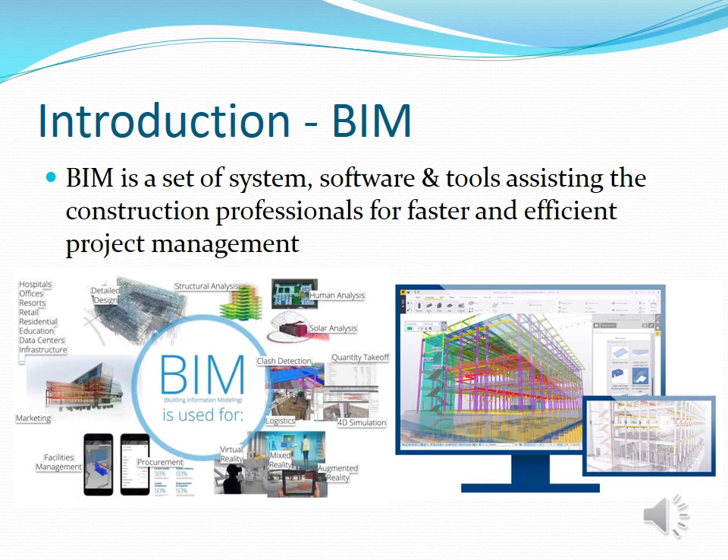Although it is a very good system, its use in Hong Kong is still very much limited. In recent years, Housing Authority requires construction projects to integrate with BIM, but only a few famous projects in the private sector could be selected within the Hong Kong territory. In this focus study, One Island East Commercial Centre is selected as our target building, and how it is integrated with BIM applications will be explained.

One Island East is a building located in the Eastern District, which is used as a Grade A commercial centre developed and owned by Swire Properties, built by Gammon Construction Limited. Unlike any other commercial and office buildings in the Eastern District, One Island East is a 70-story Grade A commercial building located at North Point. It was the first commercial building designed and constructed by BIM in Hong Kong.

This fascinating and advanced technology is a game changer to the construction industry, as it greatly cut the time, made it more efficient and faster to build. The coordination between builders' works and building service works was better as well.

The main reason for adopting BIM technology, according to Swire Properties, was the comprehensive 3D geometric coordination offered by BIM. Everyone in the industry knows that there are lots of parties taking part in a construction project. Building design, structural design, quantity and cost estimation, building service works, and defects rectification parties are no exception. However, the coordination between these parties is always troublesome. In the old days, no BIM could be used in buildings.

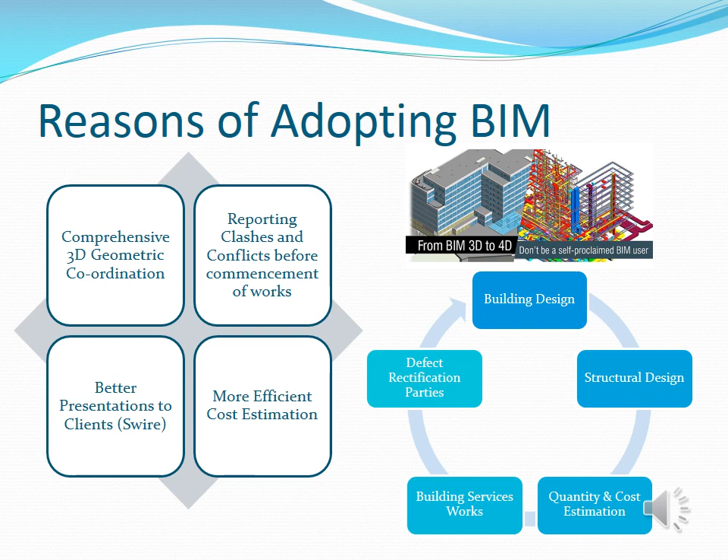Time is always the most important element of a construction project, and thanks to BIM, it saved much time in this project. This mighty 70-story building project just took 3 years to complete, which was a huge step up for the construction industry in Hong Kong.

The diagram on the screen shows the areas of BIM applications in One Island East. 3D means graphical design of the building, according to a handbook for construction planning and scheduling. The BIM for the One Island East project was generated by Gehry Technologies' Digital Project software, so a comprehensive model could be better delivered to Swire.

4D means construction sequencing and project simulation with the BIM model. During the tendering process, in selecting a main contractor responsible for all of the builders' works, all the contractors submitting their tenders were required to hand in a 3D BIM model with construction process simulation.

Over 2,000 clashes and conflicts were known before the commencement of works. And 5D refers to the cost estimating and electronic tendering. The BIM model integrates design with quantity respectively. The estimator could easily check how much material has to be used in that element. With that, the bill of quantity could be generated faster.

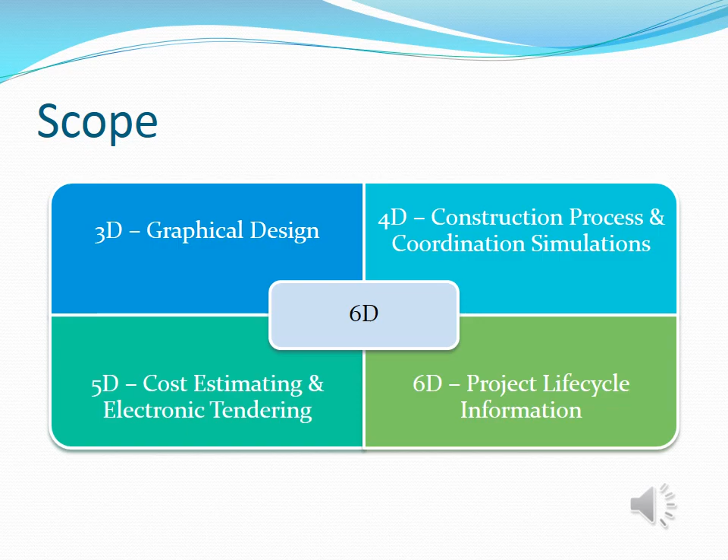In the next session, I would like to talk about the application of BIM in One Island East. In the 3D models, the client Swire Properties has adopted the Digital Project software from the BIM consultants. It comprises two functions, product modeling and process modeling. It also allows clash management, and it integrates the various CAD drawings, for example, MEP drawings and structural drawings.

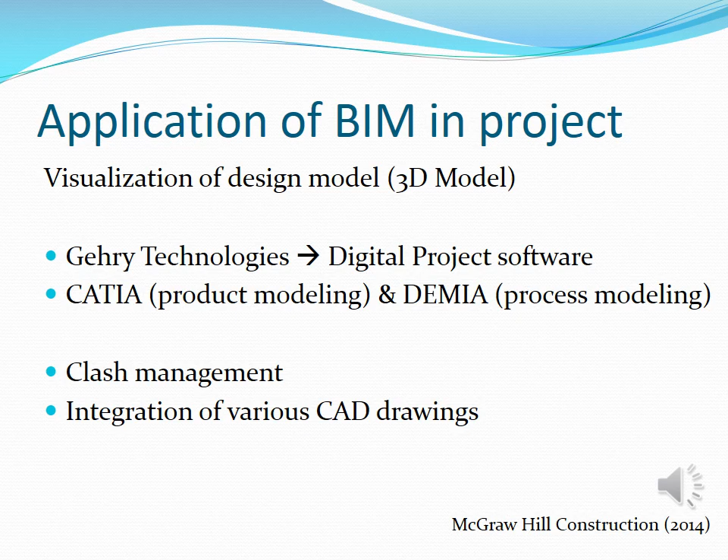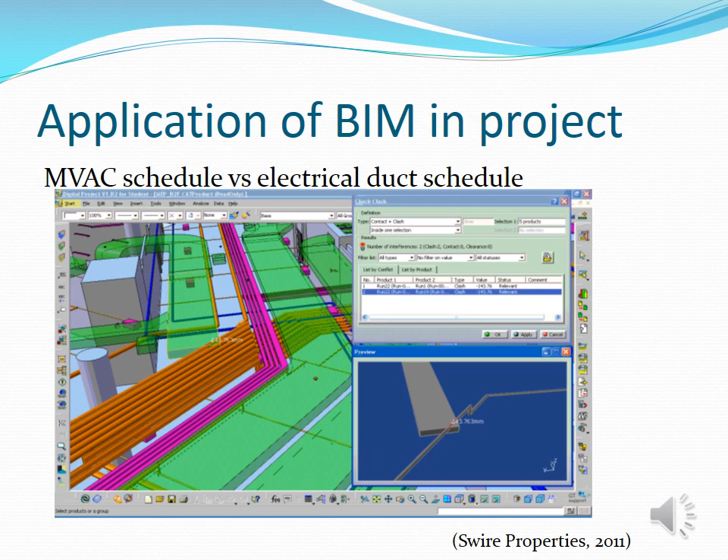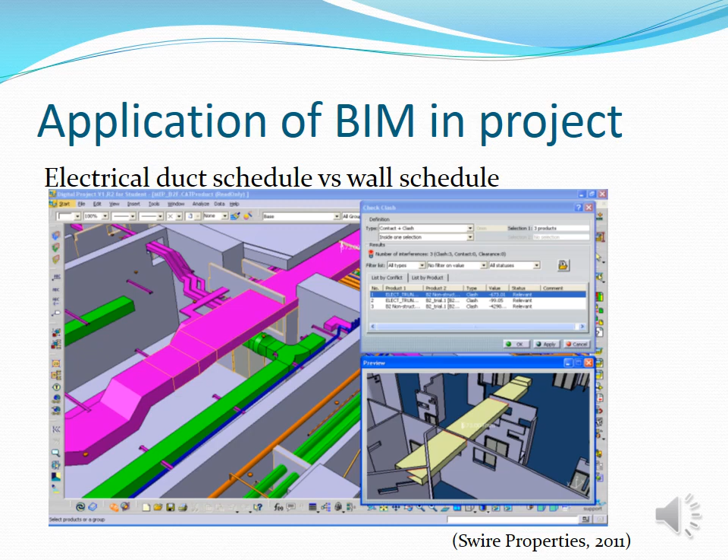Here we can see the clash was detected from the 3D models. And this is another example of clash management. In this case, Microsoft Project was used for project scheduling. The work breakdown structure was built in the 3D models, and the contractor can use the work breakdown structure to handle and update the BIM model data.

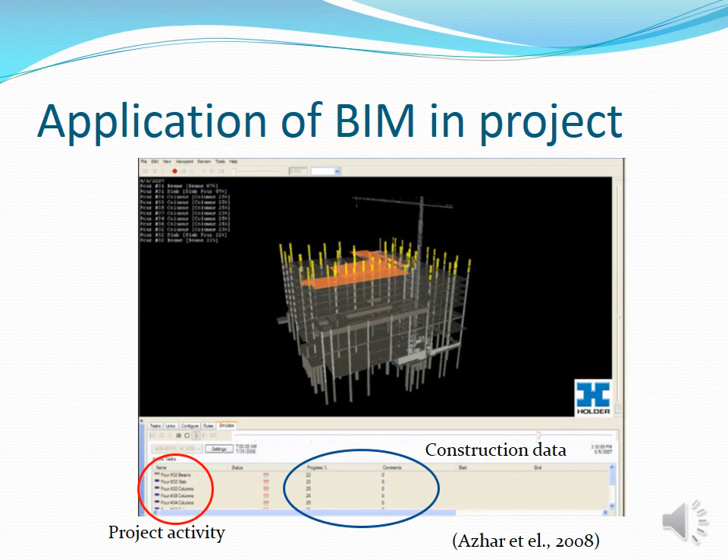By using BIM, the process of the project activity can easily be maintained by inputting the construction data into BIM models. Using BIM can schedule the construction sequence, and workflow clashes can be avoided. From the figure, we can see that the workflow was planned and scheduled, for example, from formwork to concreting.

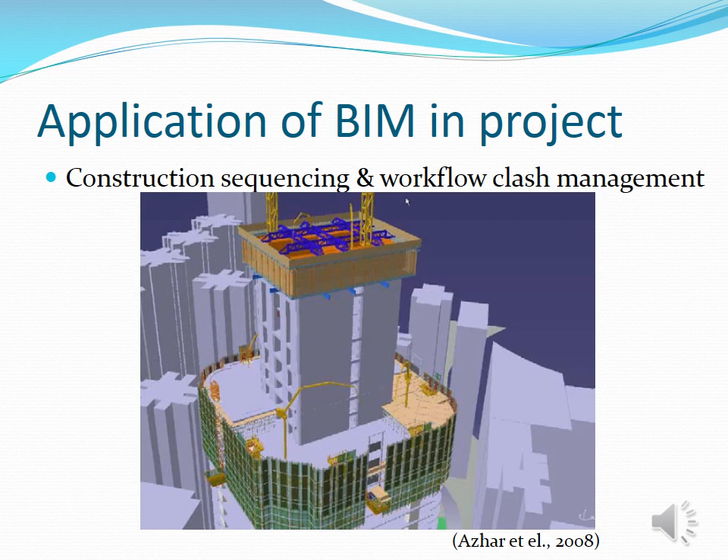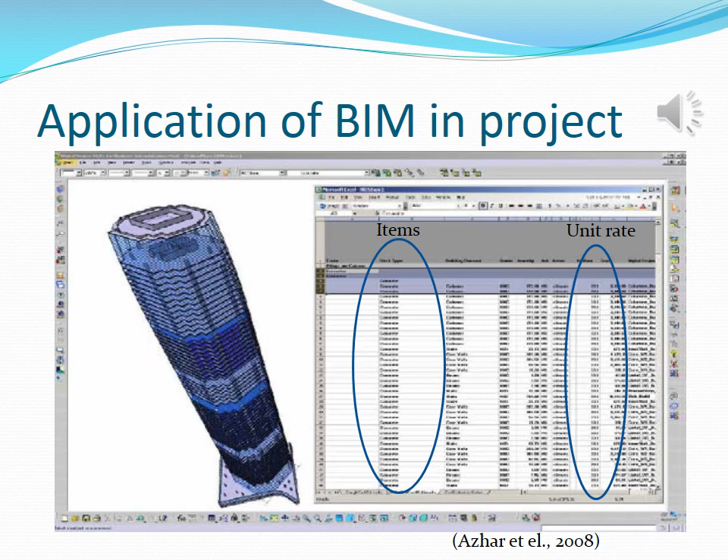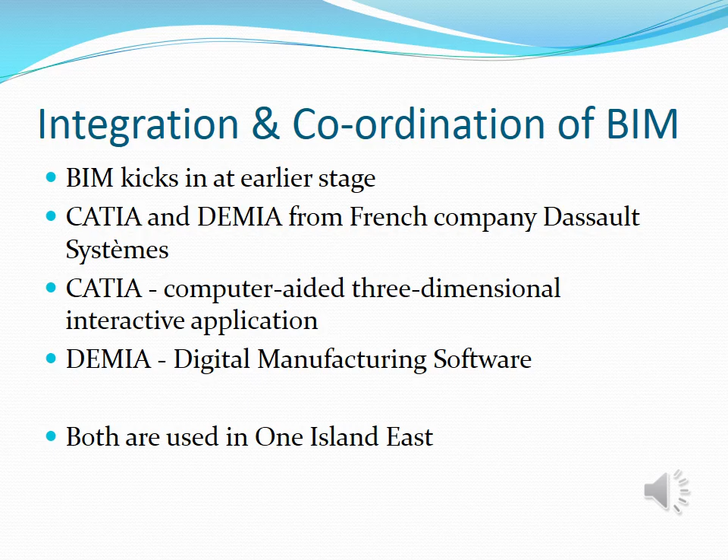After construction completion, the BIM model will be transferred to Swire again for facilities management. The BIM model will be used in operation and management and also RMAA works, for example, to schedule plant maintenance. For integration and coordination of BIM, BIM kicks in at an early stage, in which two programs from the same French company are used.

The decision of adopting BIM was made after reaching the schematic stage of design, and in this project, all elements, including the plumbing system and electrical system, are all used in BIM. Also, Microsoft Project and Primavera are both used in this project. The O chart of One Island East is a bit different from an ordinary project, in which the element of BIM is added into the O chart.

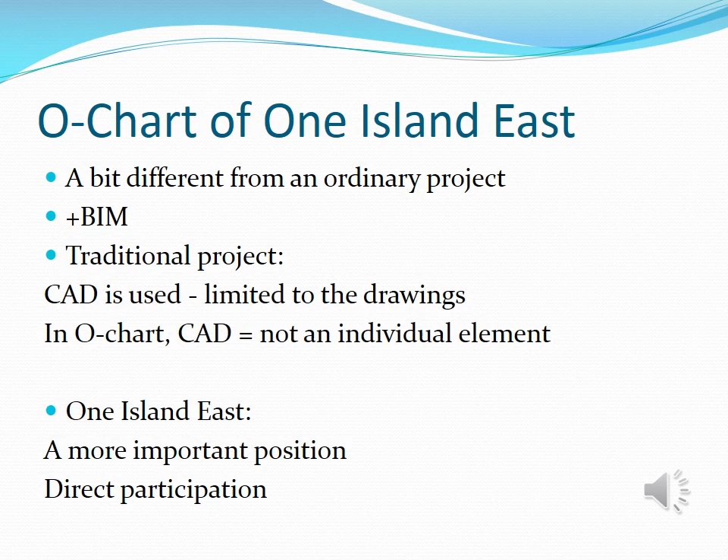For a traditional project, if CAD is used, CAD can only have a limited scope of work, so CAD cannot be added into the O chart. But for One Island East, there is a more important position for BIM, and direct participation is achieved. So the O chart will include this BIM element.

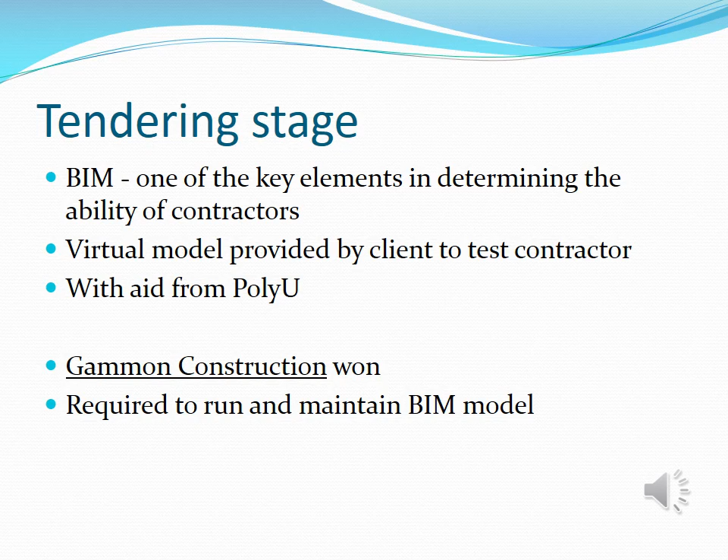In the tendering stage, BIM is regarded as one of the key elements in determining the ability of contractors, in which virtual models were provided by the client to test the ability of contractors with aid from PolyU. Finally, Gammon Construction won the tender, and Gammon was required to run and maintain the BIM model throughout the whole project.

In the construction stage, the use of BIM enables the project manager to coordinate the working sequence more effectively, for example, the arrangement of subcontractors. Also, BIM can foresee what should be done next. For example, the movement of construction materials or the movement of labor can all be visualized in BIM.

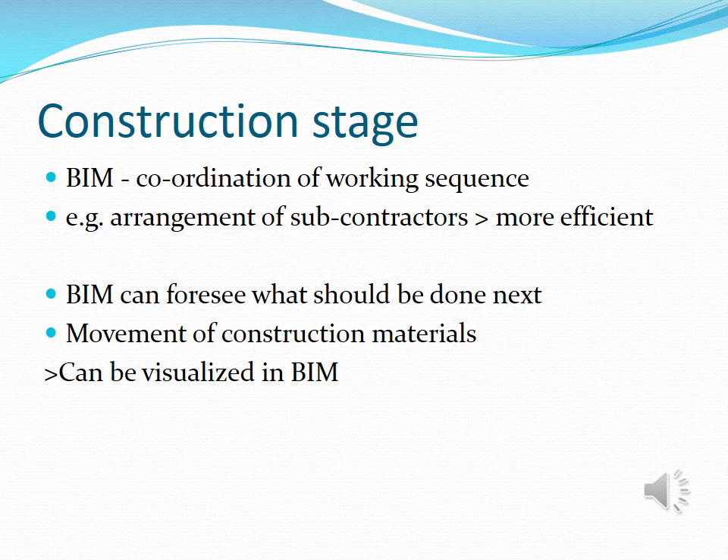For the performance of BIM application, One Island East achieved a project schedule 24 months ahead, as well as a 20% saving of construction costs. Also, 150 clash detections were made per week, and 254 cubic meters of materials were saved. Also, One Island East has achieved awards at an international level.

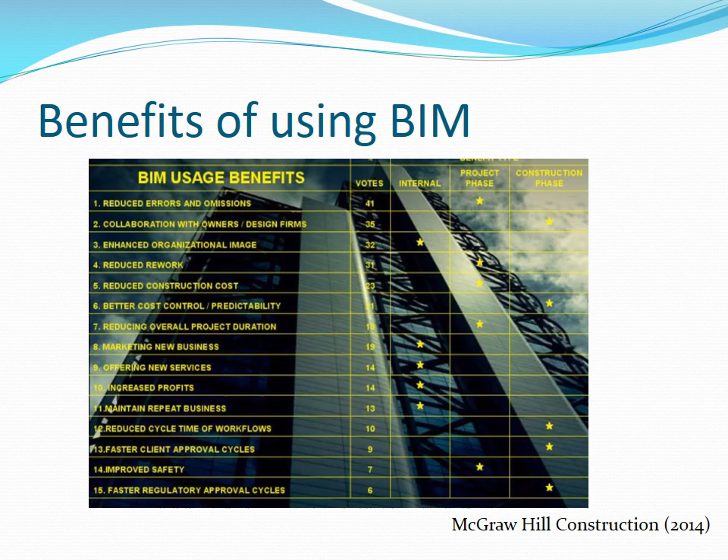Let's talk about the benefit of using BIM. McGraw Hill Construction conducted a survey about the benefits of using BIM, as selected by construction companies. The advantage of BIM is to reduce error, and clash detection can prevent overlap of elements. The contractor can avoid making mistakes in the construction stage, and a lot of manpower and materials can be saved in terms of time and money.

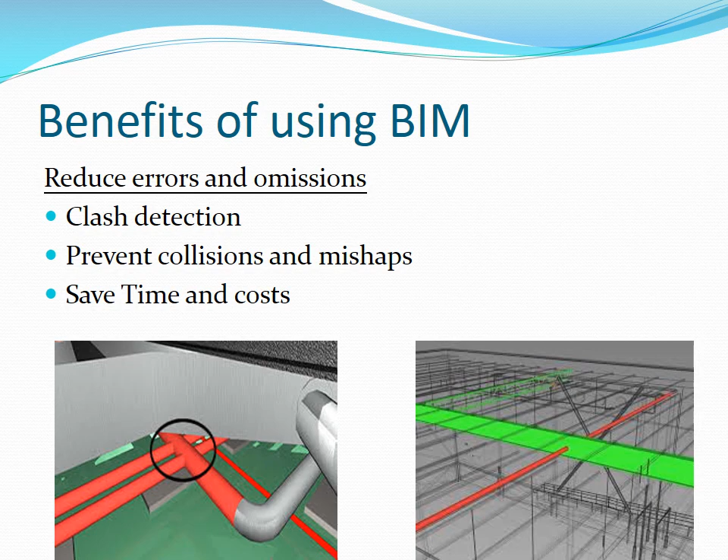It can also improve cooperation with owners and design firms. A BIM model is easier compared with the traditional drawing. All parties are recommended to work together and share information with each other. Everyone can contribute to the development of the design.

It can enhance the organizational image. It is a new tool and using BIM seems more professional. The image enhancement should clearly lead to more jobs. That means the economic benefit.

Let's talk about the limitations and challenges of using BIM. According to the NBS National BIM Report, it mentions the most affecting challenges and limitations why companies did not use BIM. The first is the lack of in-house expertise; the reasons relate to the project size, client demands, and no skillful manpower in the market. The second limitation is that the demand of clients was not enough. Although the government is trying to use BIM in public projects, some clients did not have enough budget to use BIM, such as for A&A works.

Some interviewees mentioned that there is not enough training in the market. That is the same as Hong Kong. Only a few degree programs and courses, such as IVE, have provided BIM subjects and lessons. And cost is the most difficult reason. BIM needs to make a profit, and the cost of using BIM includes the software, training and time.